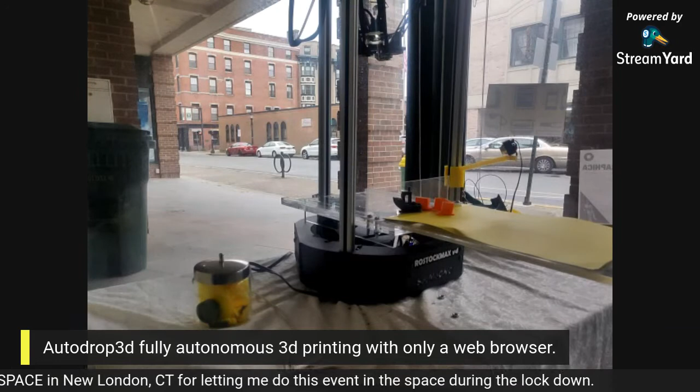I'm going to switch over to the feed of the printer. Shoot, I missed the auto eject sequence. So just so everybody knows, I just moved the print that finished back onto the build plate, because when I go to start the next job, I wanted to show the full auto eject sequence. There's no funny business, I just missed it, so I wasn't able to switch off the printer before it did the eject.

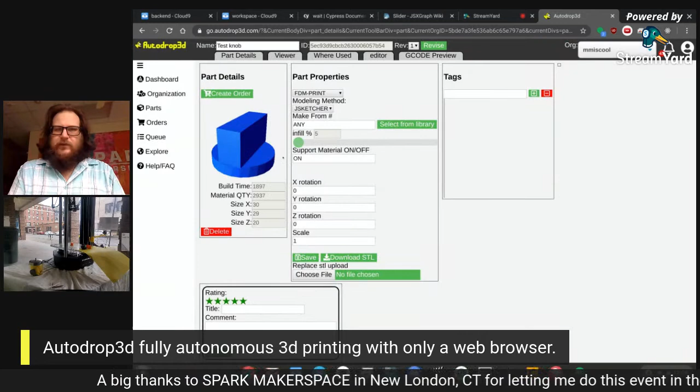Let's see here, I'm just going through and seeing how well this is all going to go, because the streaming software can be a bit slow and slow things down. That was just a little part I made earlier.

Let's see here. Okay, I'm just going to be clicking around here, doing some stuff, setting up for just doing a little practicing before the demo. This right here is actually the web browser based CAD that we have, which is really, really awesome. So I'm just going to go through and practice making a little knob here, just making sure I don't run into any hiccups during the demo. But it's going to be pretty interesting. Let's see.

Let's see here. Just going to set these to be equal radius. I'll tell this one that it should be vertical. I'll also tell this one that it should be vertical. Let's see here.

And we can do something here. I'll set these guys to be... well, you know what, I'm just going to do this. I'll just do a dimension from there, and we'll do, I don't know, 5 millimeters. And we'll do a dimension from there, set that up as 5 millimeters.

You know what, I actually don't like that number. So I'm going to set that up as 3 millimeters. We'll set this one. Did I not do this one? I did that one. Where is that distance? Distance between two. Distance.

No. Whatever, there we are, we got something. And I'm just going to go and extrude that. Let's extrude that maybe 15 millimeters.

How about this? I can go and fillet these guys off. Let's set that for 10 millimeters. Let's set that for 5. There we are.

So we're making a little knob here. And I'm just going to do one more sketch here. I'm going to just go and put a hole in so that we can fit this on something. I'm going to set that radius to 5 millimeters. I'm going to set that to, let's just say, maybe 2 millimeters radius. There we are. So that's going to be a 4 millimeter hole that gets put in there.

And I'm going to cut that out. There we are, got a little knob there. And let me get my info - I can reorient it if I want. Look at my G code.

Okay, got a nice little G code preview there. Okay, I think I'm going to be good to do this.

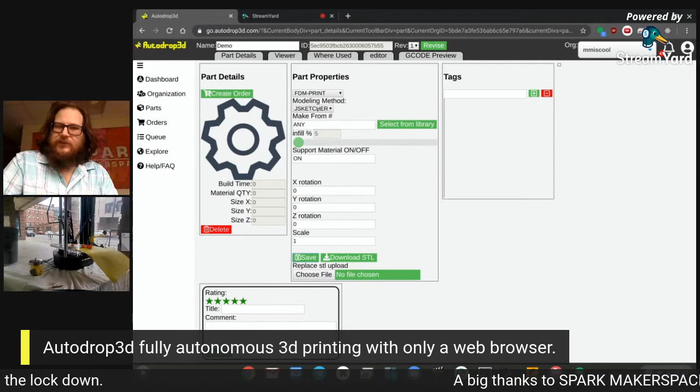So now that I have it set to JSketcher, I can come over here to Editor. What this is going to do is start up a blank, empty CAD session. I'm just going to go and hide this bar here a little bit so I have a little more space, and I'm going to start out by drawing a plane.

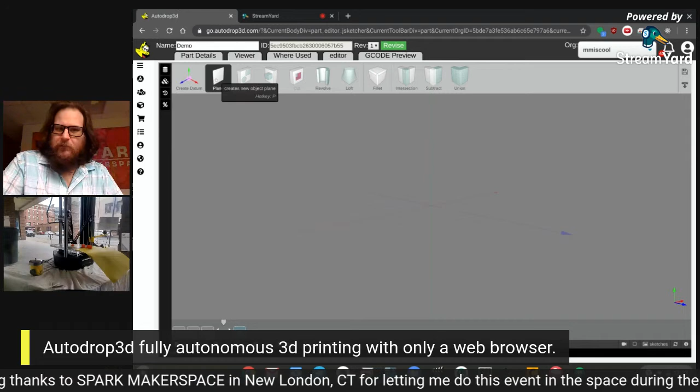And what this does is it just creates a plane out in 3D space. I could do some more with it, but I'm just starting a sketch here. If I click on it, it becomes highlighted, and now I can sketch on that plane.

And I'm just going to start drawing something. So I'm going to draw a circle, and I'm going to set the radius on that. Let's just say I'm going to set it to 15 millimeters.

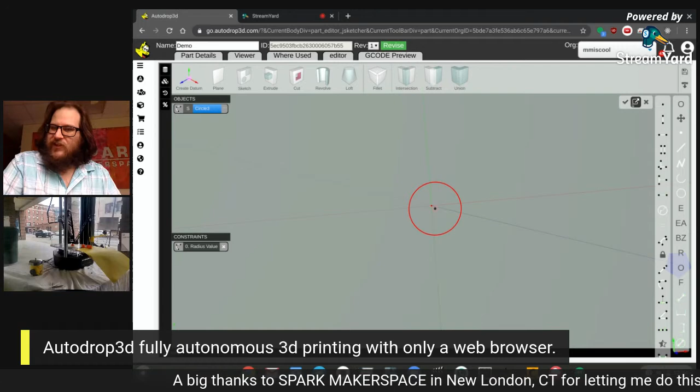So there we are. I've drawn a circle, and I've set the radius on that circle to 15 millimeters. I'm going to finish my sketch by hitting the check mark, and there's my sketch in 3D space.

Now if I go in here, I can do an extrude on that sketch, and I'm going to set my extrude length to 5, because we're going to make a tiny little knob here.

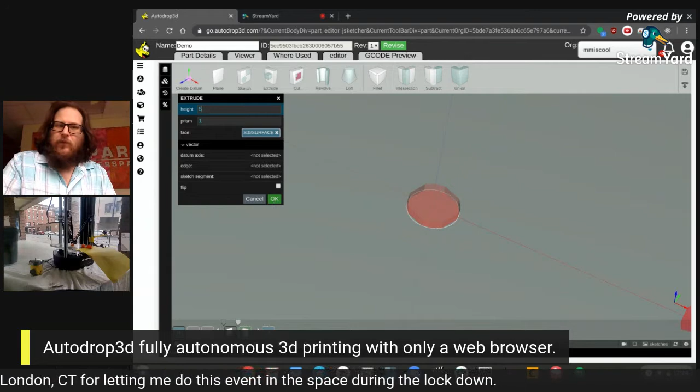One of the most common things that people go and print, besides all the little action figures and figurines and whatnot, is knobs. This is one of the most common things you'll see people printing, so this is an easy demo to go through and show a workflow for this CAD software.

So now that I have my little extruded disc here, what I can do is pick on the surface that I want to sketch on, and I'm going to sketch a bit more here. I'm going to add in a portion of the knob so that you can grab it and rotate it.

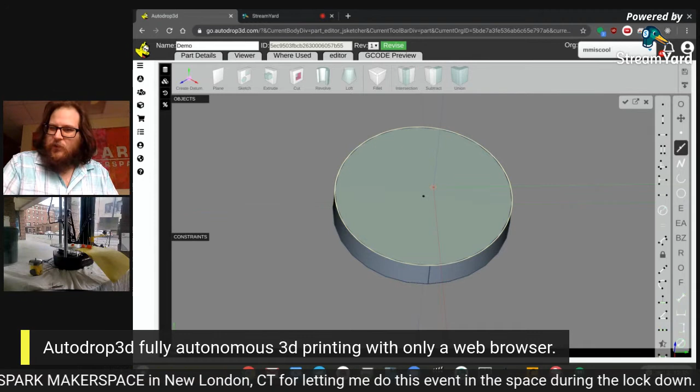So what I'm going to do is draw a couple of line segments here, and I'm going to draw in a couple of arcs.

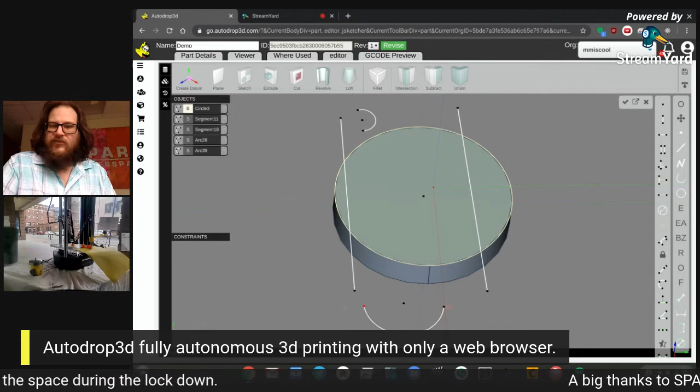So the software we're using is actually a parametric CAD software, and this is all running right inside your web browser. This is part of the platform, and it allows you to get in there and start designing things immediately.

Part of this is I can go and do constraints on my geometry. For example, if I highlight these two points by holding Shift and clicking them, I can tell them that they are the same point. So right here I'm adding in the coincident constraint, and now the center point of this arc is right there.

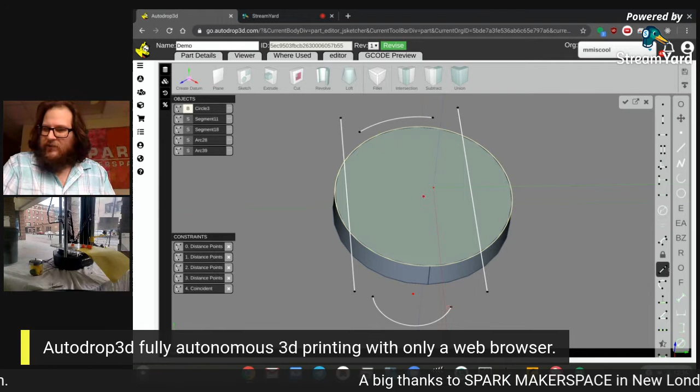I'm going to do the same thing here. I'll pick those two points and constrain the center point of that arc to be there. I'm also going to set these arcs to have the same radius, and do the same thing here, just setting them to have equal radius.

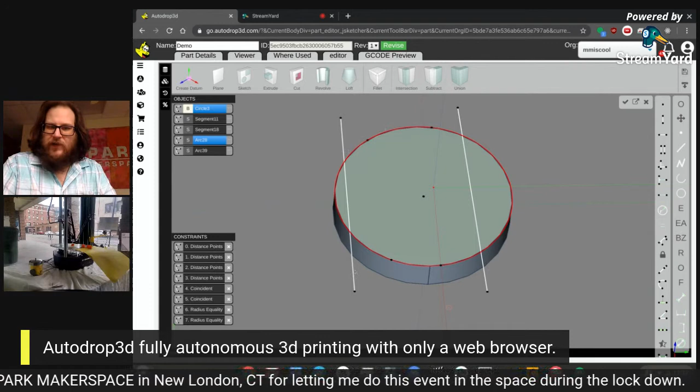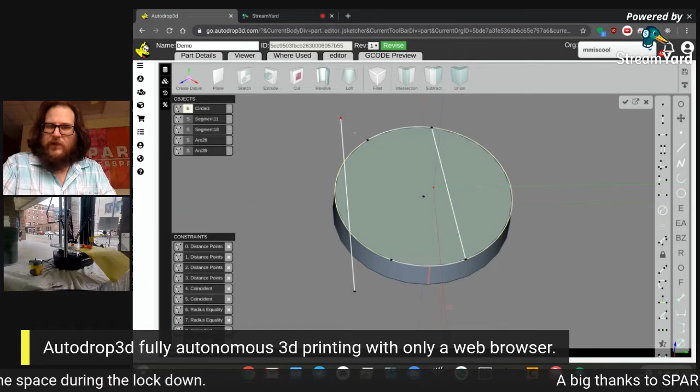And we already have these two lines here, so I'm going to constrain these so their endpoints line up like this. I'm going to do the same thing over here, just going to go and do these kinds of constraints.

And now I can click and drag on it and notice how the geometry all updates. I'm just going to set up a couple more constraints here. So I'm going to set up a distance here, and I'll set that to, let's say, 5 millimeters.

And I'm going to do the same thing here. I'm going to set up a distance here, and set that up as 5 millimeters also. So now I have this.

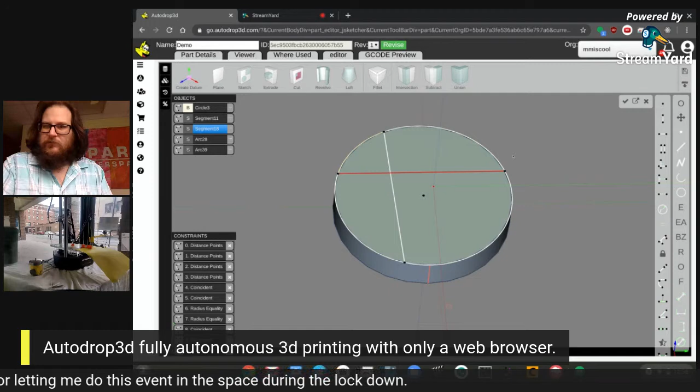Oh, you know what, I need to set this one to be vertical. Oh well, I guess I don't want to do that. You know what, no, I'll just go with it. I'm going to set this one up to be vertical also. So now those are all constrained fully.

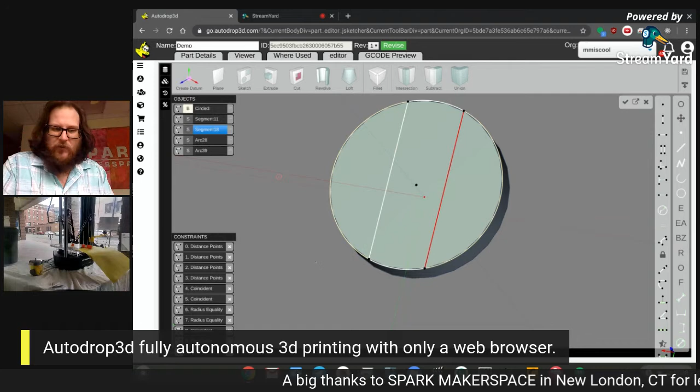I can't move them anymore. They are where they're at, and I have them all dimensioned here. If I wanted to update one of these dimensions, let's say I wanted to modify my distance from here to here, I could see my distance constraint down here and set this to something else, like 4 millimeters, and it would update. I could basically go back through and edit anything in here just by updating some values.

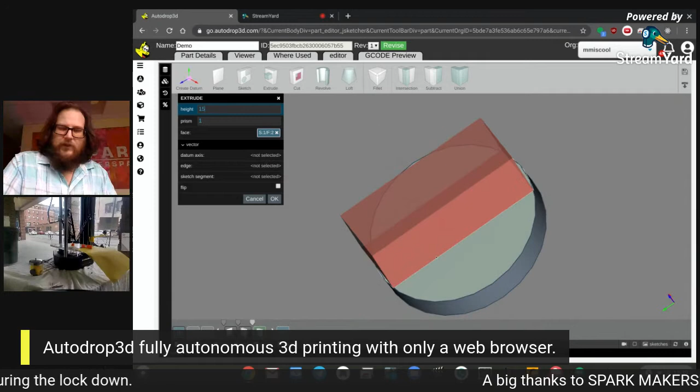So now that I have that done, I'm going to hit this check here to finish my sketch, and I can extrude. When I extrude, I can set the value on the length of the extrude, so I'm going to set that to 15. There we are, and I think I'm good with that. I'll hit OK, and now you can see we have this 3D knob-looking thing starting to take shape.

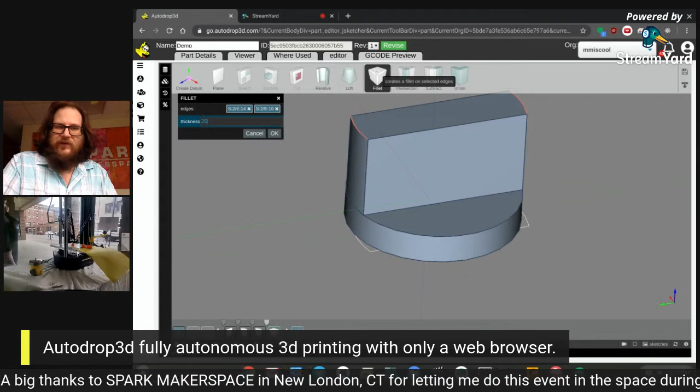Now, you know what, I want to round these edges here. So I'm going to go and pick those edges and put in a fillet here, and I'm going to set that fillet radius up to being 20 millimeters.

Oh, looks like I got somebody coming in here, so I'm going to have to go and put my mask on. Hey Brian. Hey, doing the stream. All right, okay, so are you talking to people? Yeah.

Through that? Yeah, it's through the computer here. Oh, you're talking. Okay.

All right, cool. So basically, there we are. We have a knob, and I've added in some fillets on the edge of it. Now I guess the last thing I need is a hole in there to mount this onto something.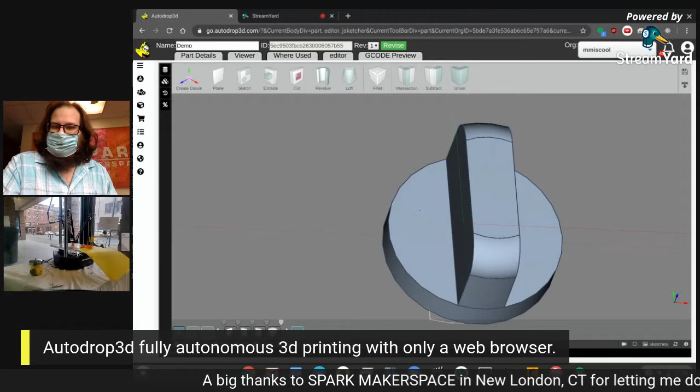We'll take this off now, and I'm going to go sketch on here. I'm going to put in the stuff I need for this knob. So I need an arc.

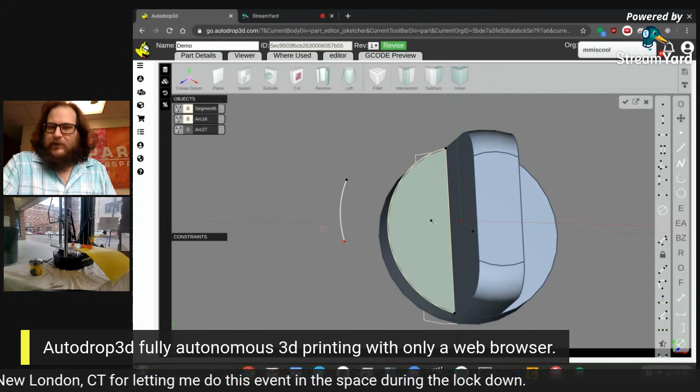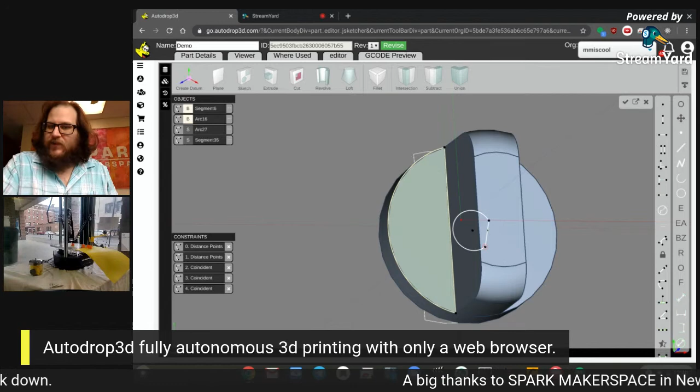I'm going to constrain those two points and set it up so that's coincident with the center. I'm going to adjust this a little bit and draw a line here. So basically what we're doing is we're going to set up the locking feature on here.

This is going to be the flat that locks against the shaft. What I'm going to do is set a length on that here in a second. First off, I'm going to set a radius here.

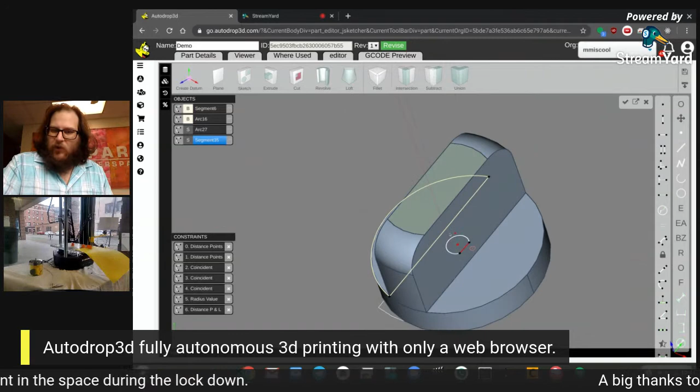My radius is going to be 2 millimeters, and I'm going to set a distance here from the center, let's say 1.5 millimeters. So now I've modeled what my hole is going to be in here, and I'm going to cut that out.

Oop, I got the wrong thing selected. There we are, I'm going to cut that out. And now I have a 3D part that is basically finished.

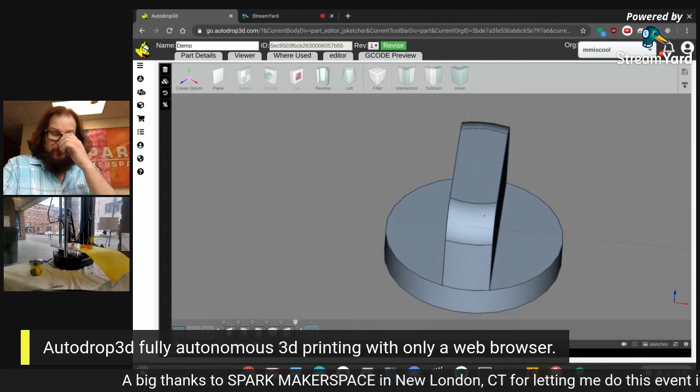So what I can do at this point is save my part, and go back over to my part details tab. It's going to tell us about how long it's going to take—this is a generic estimate. It's going to tell us how much material it will use to print that part, and how big my part is.

Now it's oriented the way I like to have this part printed, with the flat part down that you're not going to see. But if for some reason I needed to reorient it, I can enter a value in one of these rotation fields and hit save, and you can see how the part rotates, so you get a preview of the orientation when it's going to print.

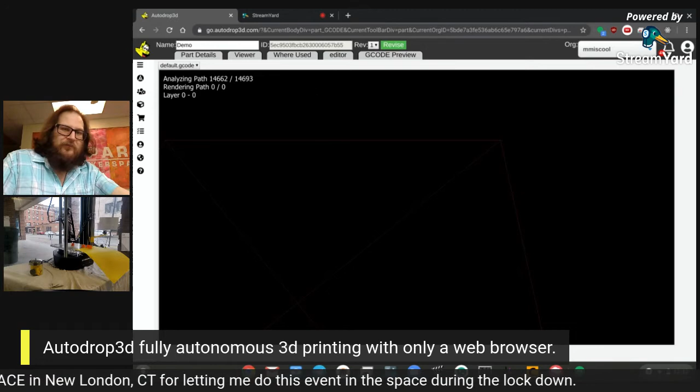If I come over here to the G-code preview, this shows me a generic slicing profile result of the slicing. That allows me to see whether there were any problems with the slicing. A lot of times, if you're importing parts from other CAD packages or 3D modeling software, you'll have problems with the 3D model.

Oh, I'm going to switch over to the other stream here. Hold on. So the eject.

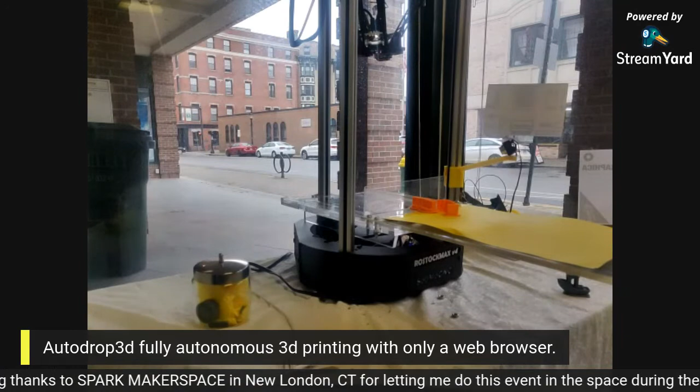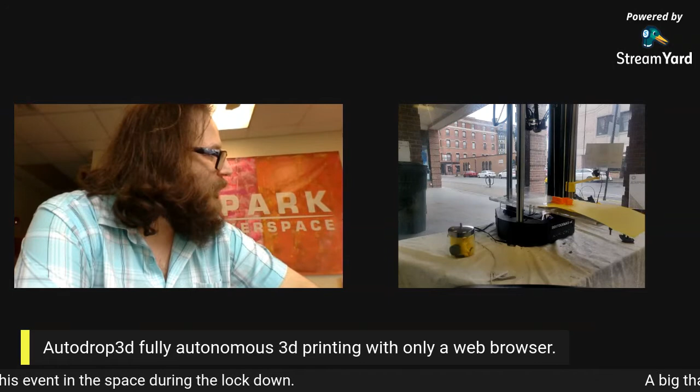So what we saw right there, I didn't quite have it timed right, but basically the printer automatically ejected the last part it was printing, and now it's going into an idle state where it waits for the next job, which we're actually going to give it now.

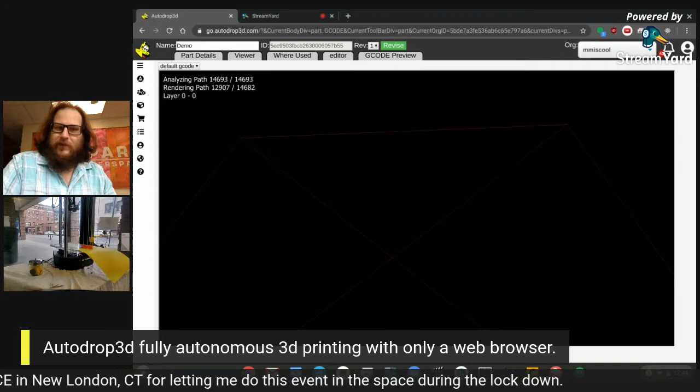So yeah, I switched my tab so it didn't finish rendering here. But basically this is going to be your G-code, a generic sliced set of G-code, so you can diagnose and see whether there's any problems with your 3D model. With the CAD software we have built in, there's not really much risk of having an issue with the STL file, but this right here would allow you to see those kinds of things.

Okay, so I'm going to go back over here to part details, and what I can do is tell it to create an order. I can pick my destination for this, so I'm going to pick my local makerspace that I'm part of, and I'm going to hit create order.

Now, when it creates the order, it shows you how much this is going to cost. Because I'm a member of my local makerspace, the cost to me on this particular part is going to be zero. But basically, your makerspace can set prices on different materials if they want, and set up their process the way they want.

And the billing can be handled all automatically through the platform. So at this point, I'm going to hit approve order. This basically means, okay, I'm cool with all this stuff, I want it to go and get made. So I'm going to hit approve order.

It says, are you sure? I'm going to say, yeah. And now I am going to go back over to the printer, which we're going to see start up. Oh, hold on.

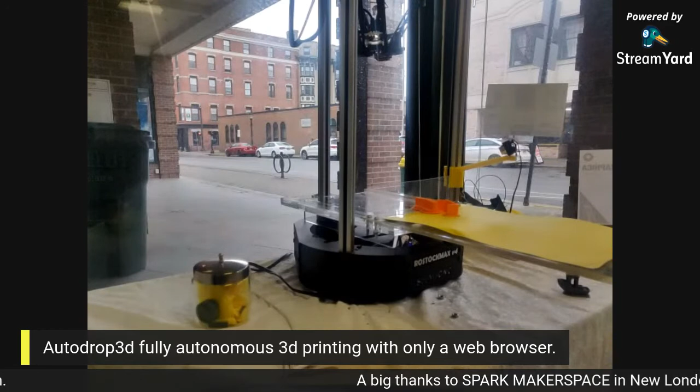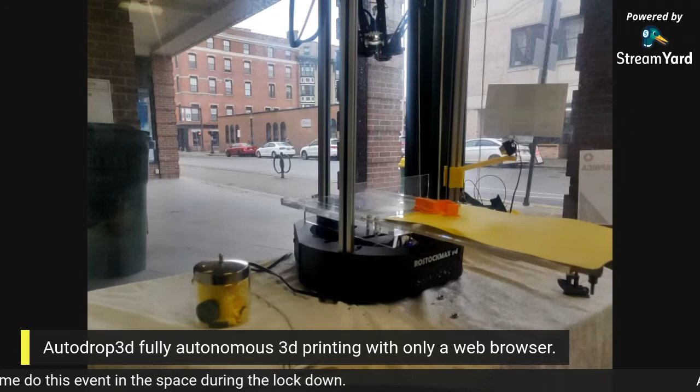So right there, we can see the printer going through its automatic ejection sequence. Basically, it's sliding the build plate forward underneath a stationary blade where it peels the item off. You see that there's a landing area in front of the printer, and that's where the parts go and accumulate.

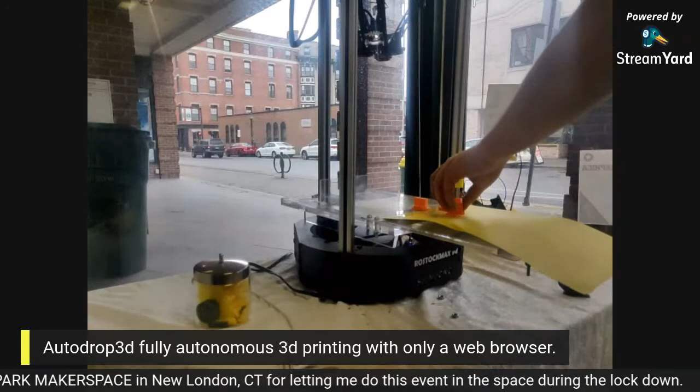So basically, what I can do is just go and pick up those parts off the landing area, and they are ready to be used. So before, is the audio still there?

Did I lose the audio? Can anybody hear me? Is the audio still working? I don't have another device here, I'm using my cell phone to do the stream of the printer. So, okay.

So basically, at this point, the printer is doing an automatic leveling sequence where it is simply testing a bunch of points on the bed before it does its next print. And it's going to start printing automatically here.

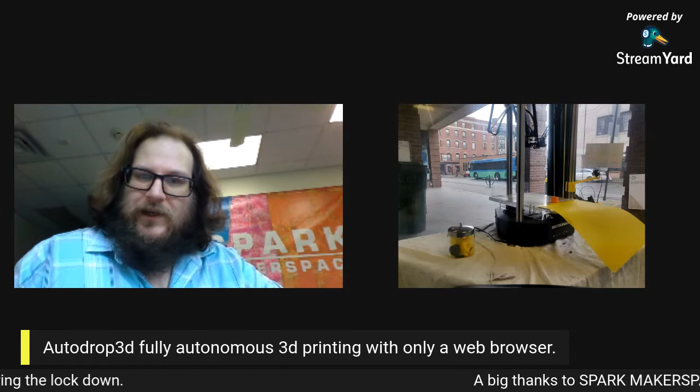I also received a notification — I'm going to share my screen here again. There we are. I received a notification in the browser that my print completed, along with a picture. And you can see, I printed out that one there. I printed out this one.

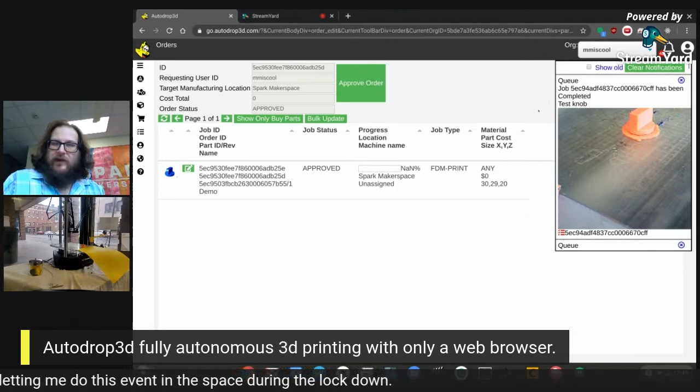I've done some prints here, and there's probably a whole bunch of other ones. I'm actually going to clear out my notifications because there's an awful lot of them.

Okay, so at this point I'll take you through a little bit of printer management and how that's done using this platform. If I go over here to my organization, there's some stuff which I have access to. I'm not going to go into the users area... actually, I can go into my users area, but normally you'd be able to go and set up permissions for people — who's an admin, who's not an admin, who can cancel other people's prints, and such.

Basically, you can go into each printer and configure it. You can set your material, your machine type, your start and end G-code, your limits for the size of the bed, and there are a lot of other options in there.

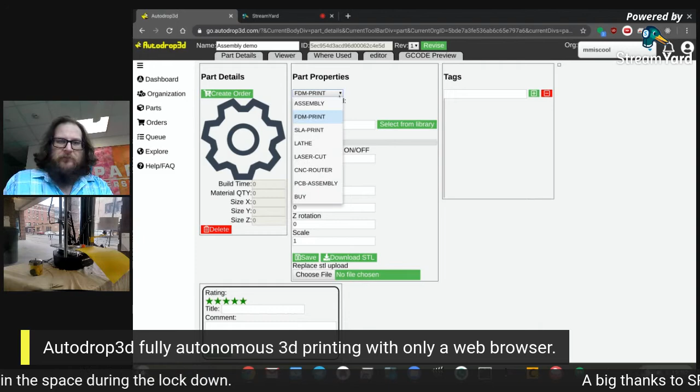Instead of this being a 3D print, I'm going to call it an assembly. I'm going to save that. So now I get this bill of materials tab, and I can add in some parts into my bill of materials.

So I'm going to add that knob. Maybe I want to add this bracket. And I'm going to add something else. Let's see, I'm going to add this fun, lovable boat. So these are all now in this assembly.

And if I go back over to my part details, I can hit create order. When I create my order, of course I could specify the quantity that I wanted. But the idea is now my order is created, and it has all of these objects in that order. So now if I go and hit approve, these guys are now all waiting in the queue to get printed.

Now if I go over to my queue, these are all of the jobs that I have, and you can see that some of them are marked completed. This one is for an order that I never approved. But the rest of these are things that are waiting in the queue. And you can see right here, this is the part that's printing right now.

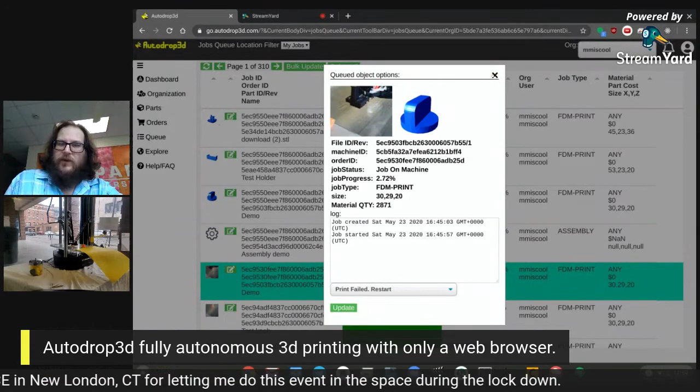I got a live picture from the printer showing me that part is printing, and it shows me a progress bar on it. If I refresh here, we can see that progress bar moves. So as my prints get completed, that progress bar will move, and I'll get a notification here in the browser that it was done printing.

Rickroll somebody with a 3D QR code. Theoretically, you could print out a bunch of Rick Astleys on here, provided you really wanted to do that. And if your makerspace had credit card charging turned on, it would get charged automatically for all the Rick Astleys you wanted to print. The Eggbutler? Yes, we're creating a 3D botnet. When the Terminators get made, hopefully they'll get made on machines like this.

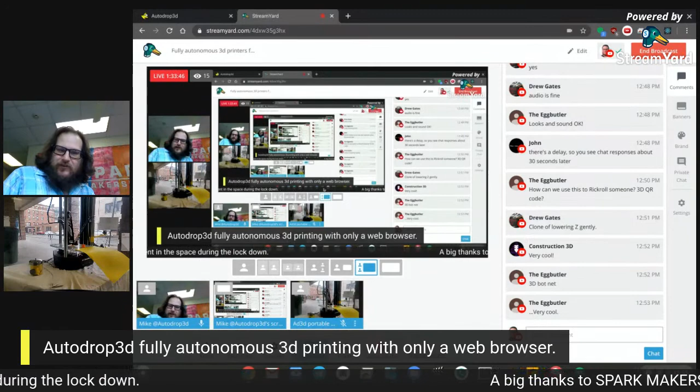One of the things we can do with this platform, and this is an appeal for anybody who is a 3D printer manufacturer: we would love to work with you to get auto ejection technologies on your machine. We've developed this in-house, and it works pretty reliably. So we'd love to have other manufacturers producing printers with this technology. The other thing is, if you're a 3D printer manufacturer who already has 3D printers with automatic ejection capabilities, we would love to work with you and hook you up to our cloud software.

Basically, anybody can hook up their 3D printer into our cloud. It's pretty easy. We have it set up so that you can use a Raspberry Pi. We have a custom image of the Raspberry Pi that you just flash onto it, and you have the G-code client, which retrieves the jobs automatically from the cloud and automatically feeds the images back, taking pictures while the print is going on and providing that last picture, which gets included in the email that goes out to the person when their job's complete.

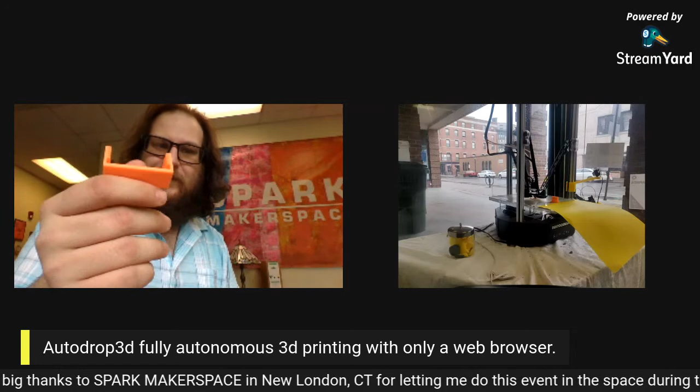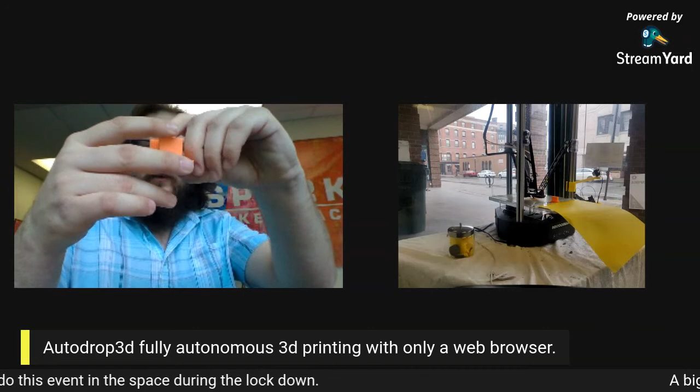So this is a part that I just 3D printed. Whenever the part is printed, at least with the slicing profiles we use, we print it out on top of a raft. The way our raft works is when it ejects, the raft gets hit by the ejection surface rather than the actual object itself, so when you print it out, you're not going to end up damaging your 3D print with the automatic ejection system.

Currently the model we're using for this is a local pickup model. The idea being that a makerspace, library, or maybe even a computer shop—whoever has a 3D printer and some kind of public-facing business or facility—can make their printers available.

I've got somebody coming in the door here, so I gotta put this thing on. Okay.

So yeah, basically, as far as failed prints go, if a print fails, the user gets an email that tells them their print completed. And if you get a picture and it shows that the print failed, you're able to report that. Depending on how your organization's set up, it'll either restart the print automatically or it will go to a moderator who checks to make sure the object actually failed.

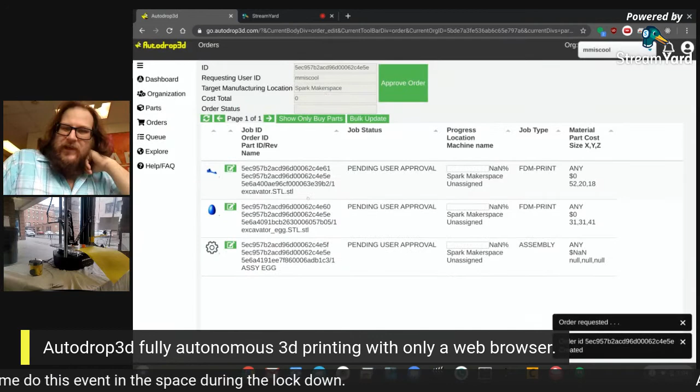Let me go and see where used. Okay, so this right here is my egg assembly, and if I open that up, my egg assembly contains both the egg and the little backhoe here. So if I wanted to, I can actually order that whole little assembly, and in this particular case, there we are. Now I have these two items. It tells me how much material and stuff it's going to use, and if I hit approve order, now that's all just waiting in the queue.

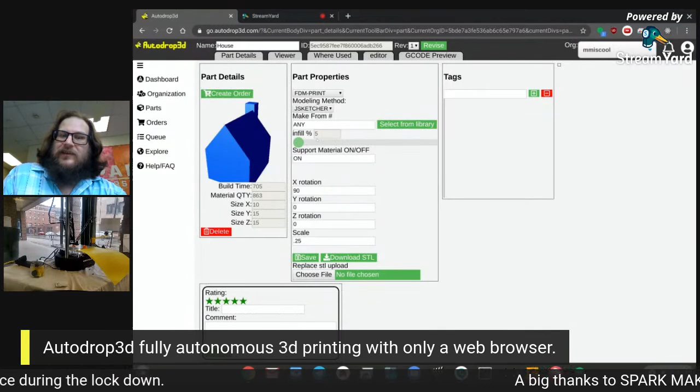I'll show the screen and do that part real quick. So this right here is that little house that the 3D printing professor wanted to see get designed. I'm just giving it a second to load up here. So right there is the house.

I'm going to actually go and delete everything here and start from scratch. Give me a second here. Okay, so...

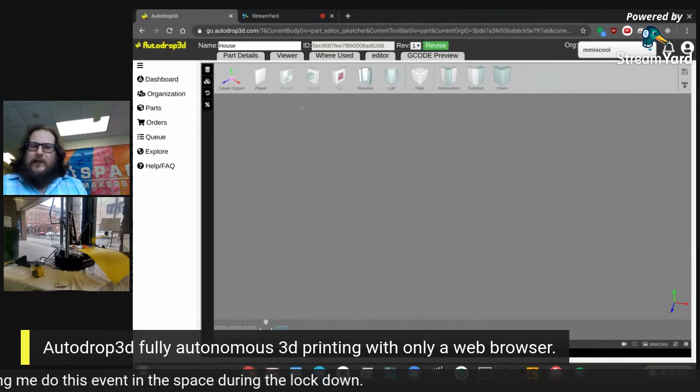In order to start off doing a model, I'm going to tell it that I want to add a plane, and it's going to ask me where I want to have that plane. I can pick any of these and hit OK. And now what I can do is I can start designing my object.

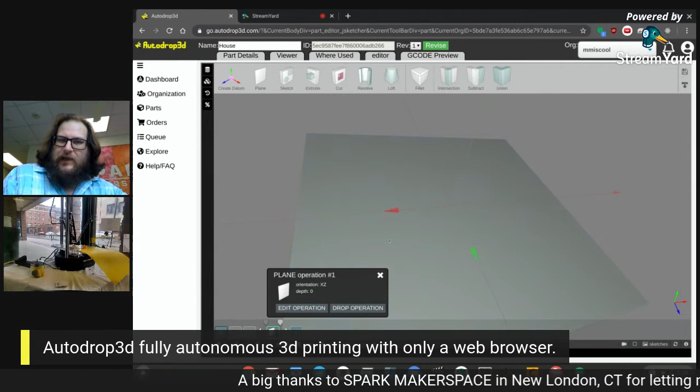So if I click on that plane, it highlights, and I can do a sketch. The way that sketching works is I have these tools here. So I'm going to use the rectangle tool real quick, and I'm going to go and draw like a rectangle here.

And I can go and set some dimensions on it. So maybe I want to set this to, let's just say 80 millimeters. I'll set this one to 35 millimeters. And I'll do some more stuff here.

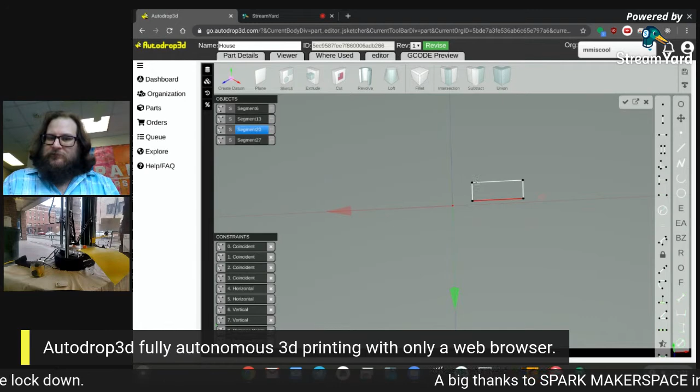I'll put the little peak for the roof in. So we can do that. You know what, I'm actually going to do this so that this roof peak has some dimensions on it. So I'm going to go and give this a dimension from the side of the house here.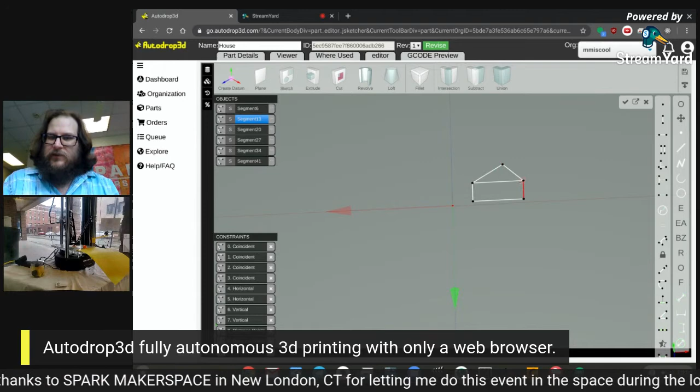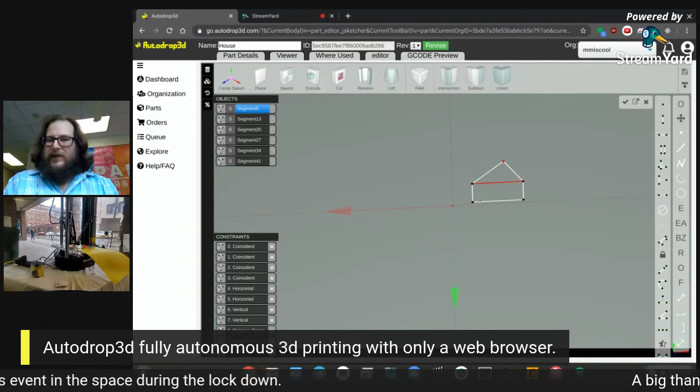So I'm going to set a dimension there, and set that to 30 millimeters. I'm going to set the height of the peak of the roof from this line, so I'll set a dimension on that of, let's just say, 40 millimeters. And I'll take this point and put a fix on it so that it doesn't move.

So yeah, there we are, we have our sketch. Now if I hit the little checkbox here, it finishes the sketch, and then I can do something like extrude on it.

Now in this particular case, I'm getting this extra piece of geometry here. So I'm actually going to go back into that sketch, and I'm going to tell that piece of geometry that it's only reference. So you can see that that is a piece of reference geometry. You can still use it for developing your sketch, but it's ignored for the purposes of the extrude.

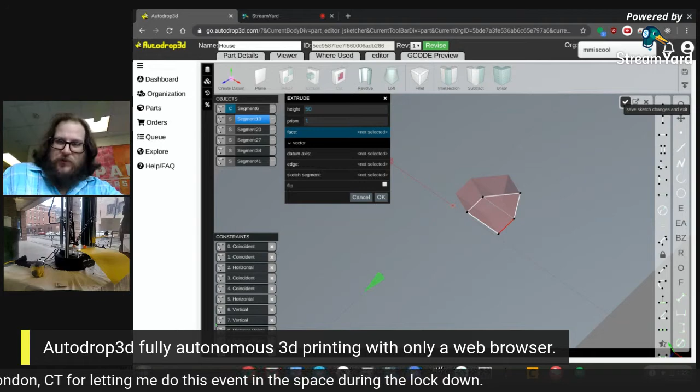So in this particular case, we're going to do that extrude. I'm going to set the value. You know what, that's fine for my length there. And I'm going to hit OK. So now I have my little house-looking thing.

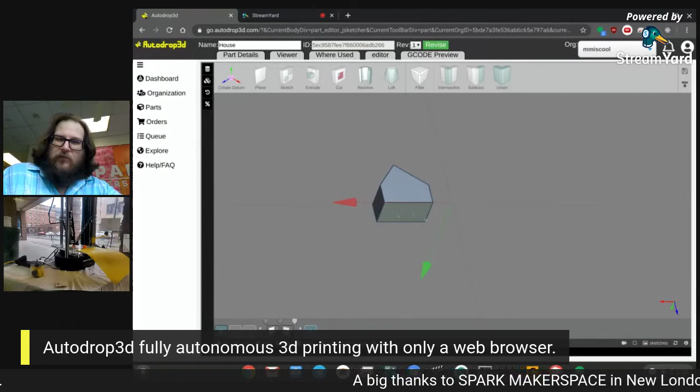Now let's say I wanted to add a chimney to this. I could pick this bottom face of the house here, sketch on there, and draw something like my little chimney. So if I go and draw a rectangle here, there's my rectangle. I'm going to use this for producing the chimney.

Let's go and set these two lines to be equal in length. So now I have a perfect square. And I'm going to set a distance on this, and I'll set that to, let's say, 12 millimeters. So now I've got my reasonably sized chimney.

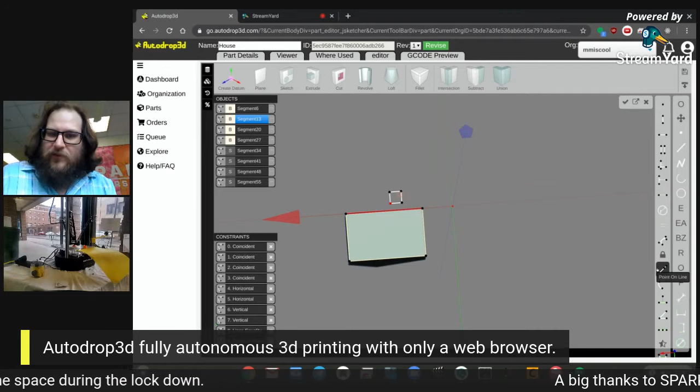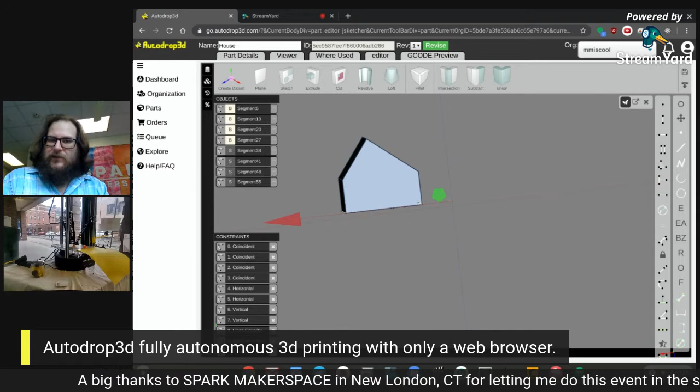Now, if I pick this line and that point there, I can tell that point to always be on that line, so now it's constrained to that line. And if I wanted to, I can set a distance from the edge there. So I'll do a distance and set that to, I don't know, 20 millimeters. And now if I hit this little checkbox, that sketch is ready to be extruded.

So if I do an extrude, it looks like it's going the wrong direction. If I hit this little flip right there, it'll flip the direction. And if I use my scroll wheel, I can adjust the distance it's going to go. So right there, that looks like a reasonable chimney. And I can hit OK. There we are, so now I've designed my little house with a chimney.

I'm going to go and hit save. And now it's saved to the cloud.

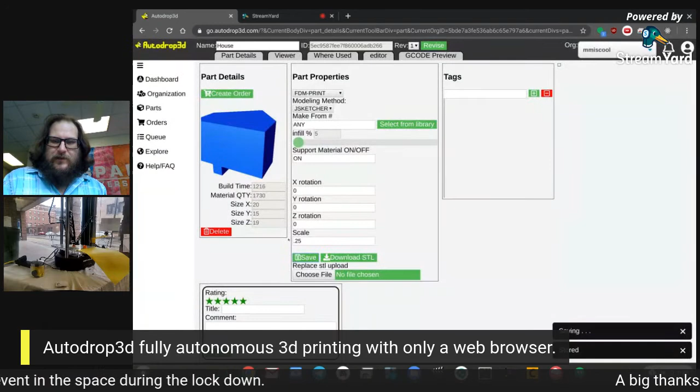If I come over here, I can see, oh no, I didn't orient it properly. So maybe I want to go and orient it properly and save that. Let's see here. Oh, now it's entirely upside down. Let's do 180 here. So now I have it oriented properly for printing.

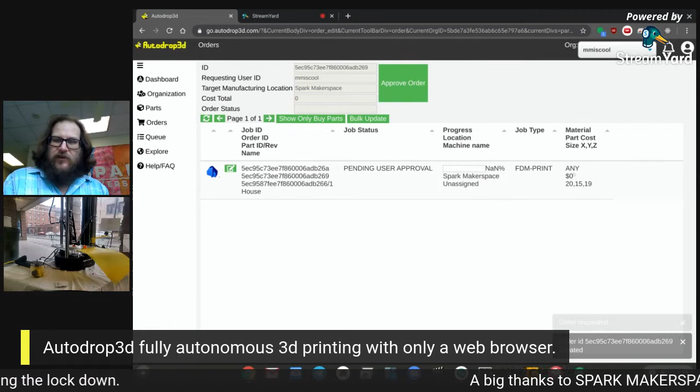I can hit create order, and I can pick the location I want to send it to. These are organizations that I have access to. If I hit create order, it brings me into the order screen where it would present me with any prices if there were any. At this particular organization, we don't have any prices set for the members because it's basically free for the members, but we can approve the order. And now that the order is approved, it's just sitting in the queue, and it will get created and ejected whenever that is done.